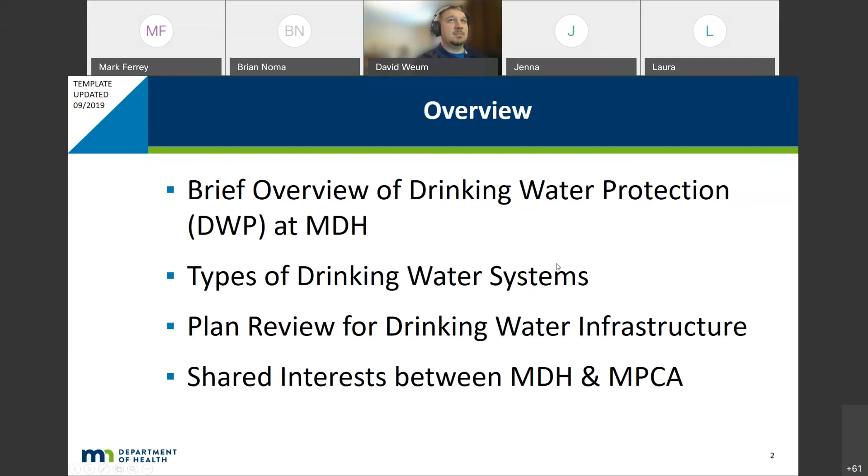So, Department of Health. Our primary responsibility is the Safe Drinking Water Act. That's a federal law, first enacted in '74, and it's been amended a few times, in '86 and '96. Basically, EPA gives the Department of Health primacy in the state of Minnesota to enforce the Safe Drinking Water Act. It regulates any water source that serves 25 or more people regularly.

The '96 amendments were kind of the big one. They brought a lot of things in, like the revolving fund, operator certification, the consumer confidence report, which is that yearly letter notification of here's what's in your drinking water, source water protection and the surface water rule, as well as cost benefit analysis for MCLs, which I thought was interesting.

I didn't know that was actually when that came into effect, but that's the big difference between the health risk limits that a different part of the Department of Health works on putting together and the maximum contaminant levels, which are the federally enforceable standards. The MCLs have a cost benefit analysis of how much more money it's going to take to treat that contaminant down to another level, and how prevalent it is, things like that.

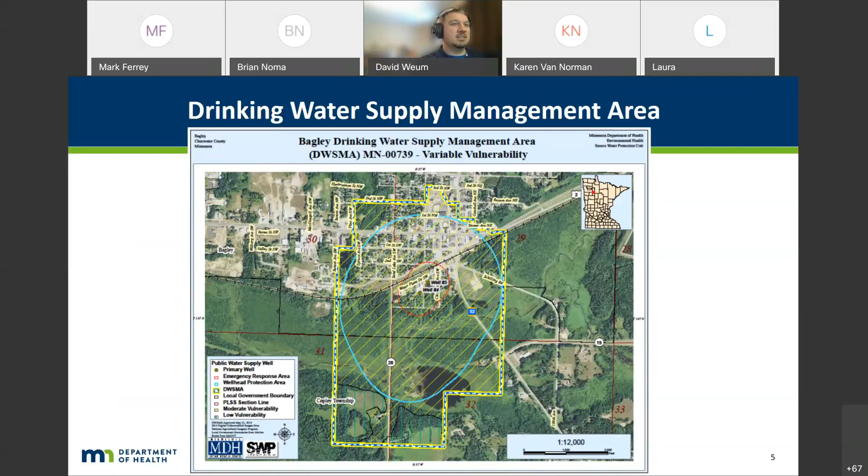And from there, I'm going to stop sharing and give it over to Brian to talk with you a little bit about drinking water systems. Oh, I'm going too far ahead.

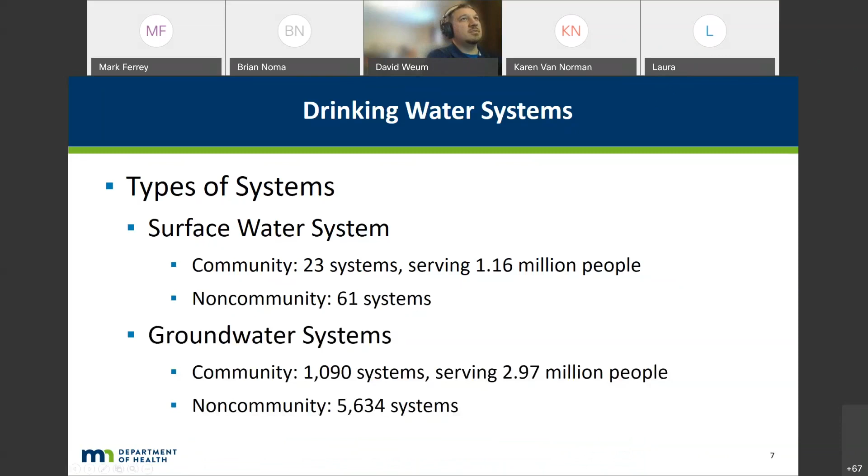All right, okay, thanks David. So I'm going to talk about drinking water systems. I'll probably be a little heavy on the community side, because that's where I reside. In this slide you can see we have two types of systems: surface water systems and groundwater systems. You're not sharing it—oh, hang on.

No. There we go. Is it up now? Yep, yes, looks good. Okay.

So two types of drinking water systems. We have surface water systems, so systems that get their source water from surface water, and then groundwater systems. So if you look at the numbers, community systems, there's 23 community systems in the state of Minnesota, but they serve 1.16 million people. So not very many systems, but lots of people.

So what I usually tell people is the typical setup is going to be very large communities, and we'll kind of show that a little bit later. We also have 61 non-community systems, and so in the non-community realm, these systems typically are going to be up in the northeast portion of the state for resorts and businesses and churches and things up in that neck of the woods.

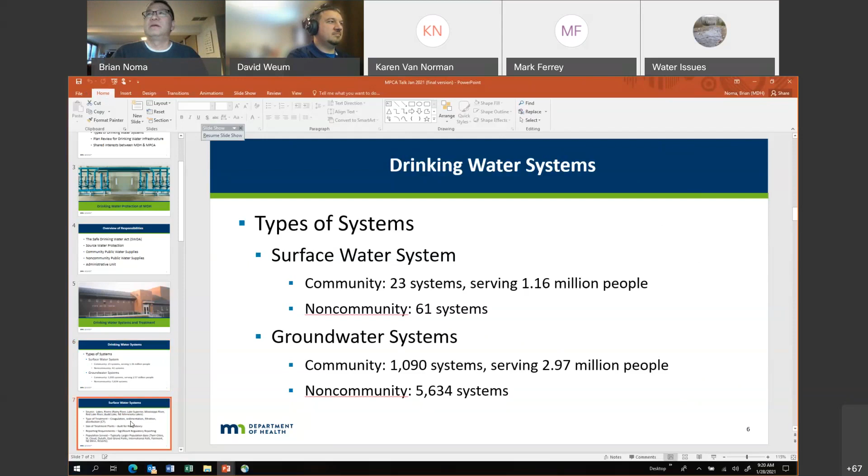Brian, the slides you're sharing, it's not showing the slide you're talking about. Oh, gosh. Do you have two monitors, Brian? Yes. Okay, that's probably what the challenge here is. So, all kinds of issues today. All right, there's my surface water slide. Can you see that now? There we go. Yep. Yes. Sorry about that.

Okay, so the sources, again, lakes and rivers. So I have a few of them named there. Budd Lake being kind of the outlier down there in southwest Minnesota. And again, northeast Minnesota lakes, areas geologically not rich in groundwater.

So the typical type of treatment is called conventional filtration, where you have coagulation. You make the particles in the water bigger. Sedimentation, you let them settle out. The ones that don't settle out, you'll filter them. And then you have to disinfect the water with chlorine or some disinfectant which does carry a residual.

And then the important part there is the CT or disinfection time. So it's depending on the water temperature and a couple other factors. We look at making sure that it's disinfected properly before it's sent out into the distribution system.

One of the kind of key things for surface water systems is they typically have to be built for redundancy, and that's so that the city or the place that it serves doesn't ever run out of water. So in this case, for a city like Minneapolis, St. Paul, or St. Cloud, you're building the plant twice as big as it needs to be for its highest demand day.

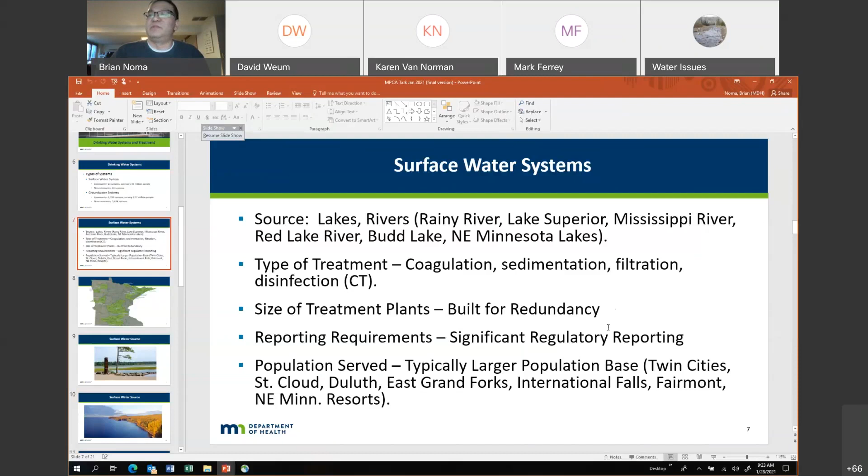And so again, we look at population served. So we got the Twin Cities, St. Cloud, Duluth, East Grand Forks, International Falls, Fairmont, and then the resorts up in northeast Minnesota. So here's a map showing the overall distribution around the state of the different surface water systems. I think the Fairmont one is kind of the outlier again, but it's in an area that maybe groundwater is not as readily available, or if it is available, it might not be of enough quality to use as a source. But you see there's quite a few of them up in the Northeast, some in the Northwest, and then along the Mississippi River.

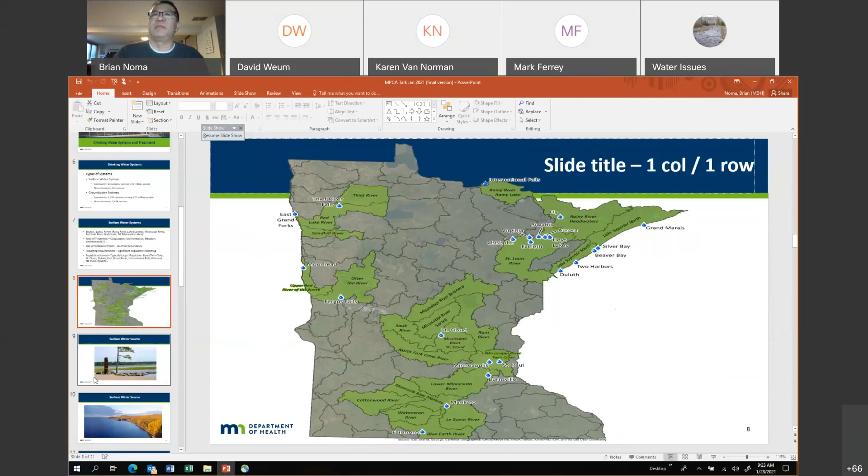So I've got a picture here. This is the headwaters of the Mississippi River. This is where it's probably at its cleanest. If you looked at the other end of the Mississippi River down in the New Orleans area, we always like to joke that it's probably been in and out of at least 15 people by the time it gets to New Orleans.

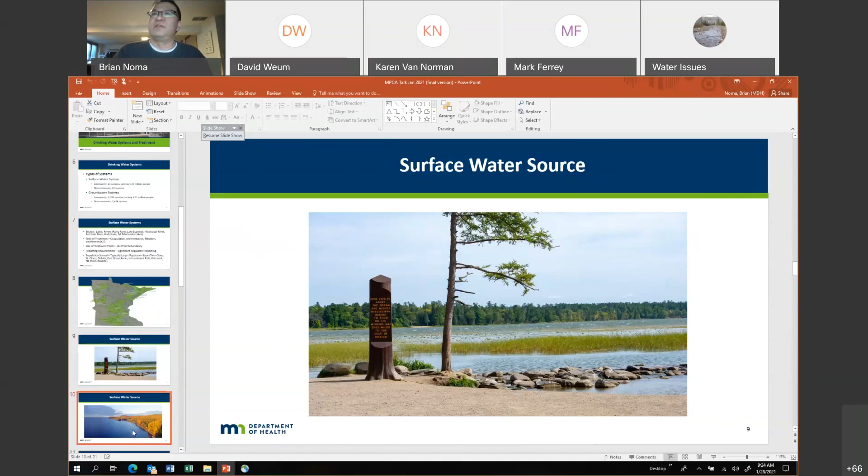And then the other surface water picture that I have is Lake Superior, and so Duluth, and I think Beaver Bay is on this, a couple other systems up the shore, but a pretty pristine and pretty clean source to start out with.

So groundwater systems, that's where most of the systems are going to draw their source water from. It's going to be either glacial drift or bedrock aquifers. For groundwater systems, some have no treatment at all, and by that I mean there's no filtration or anything else. Municipalities are required to feed fluoride, but other than that, they're not even required to feed chlorine unless they have ongoing bacteriological issues. So you could have some with no treatment at all other than fluoride. You could have chemical additions.

So what a lot of systems do is they might feed polyphosphate to keep the dissolved iron and manganese in sequestration. And then by feeding that, you are also required to feed chlorine, because phosphates are considered a food for bacteria. So you might have systems as simple as a couple chemicals. The typical treatment, though, is going to be iron and manganese filtration, but you also will have advanced treatment.

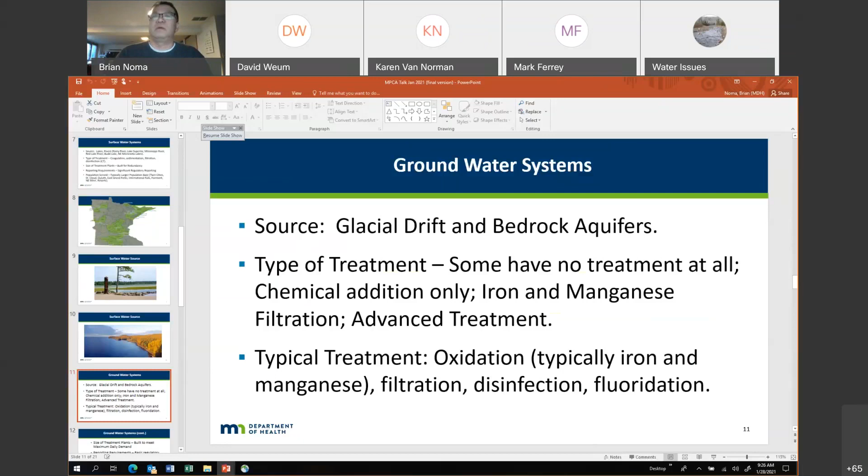So again, the treatment plants are typically built to meet the maximum daily demand. You're going to meet whatever the highest day you estimate for your system. So groundwater plants can be built quite large too, in the fact that they're probably not going to meet their maximum daily demand more than maybe a week during the year, but they do want to be able to provide water at all times of the year.

The beauty of their system is they're not going to build it double the size, and the reason is typically if the treatment plant was to go down or need to be taken down for a reason, a lot of systems have interconnects with other cities so they can get supplies of water from other cities. And then also if their ground source water is good quality, they can just pump their groundwater straight into the system untreated as long as it meets the regulatory requirements.

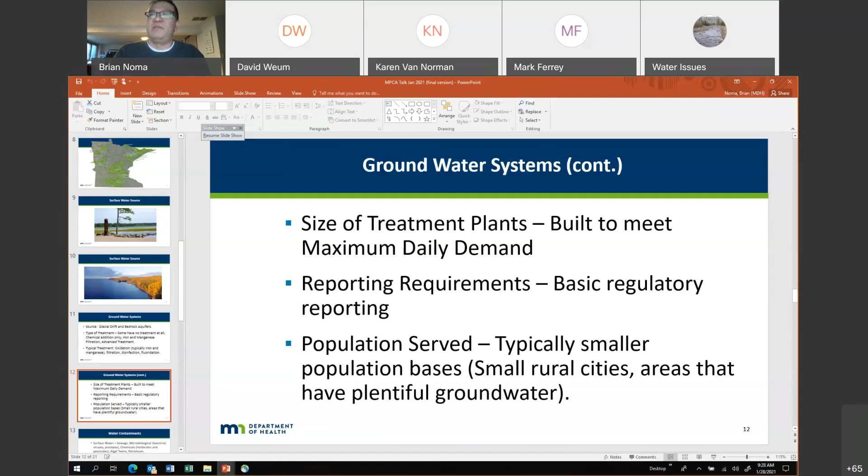And so the reporting requirements for these are pretty basic compared to surface water. There's not nearly the amount of data collection or monitoring. So there are some reporting requirements, but not a lot. And again, the population base served here is typically going to be the smaller population base, rural cities, areas that have plentiful groundwater, which is most of the state.

And then, talking about water contaminants, in the surface water realm we're looking at possible sewage contamination from discharge from sewage plants that might be upstream if they're on a river, and microbiological, so bacteria, viruses, and protozoa. We're always constantly monitoring for that.

Chemicals, herbicides, pesticides, chemical spills, chemicals being used upstream in industrial uses, and then algal toxins, which has been a more recent issue with the weather patterns that we've been seeing, and then some petroleum.

But the petroleum is more probably seen in the groundwater contaminants, where we have naturally occurring contaminants such as radium and arsenic, but we also have some man-made contaminants: volatile organics from spill sites or Superfund sites, PFAS compounds, and then petroleum spill sites, so old gas stations, buried petroleum tanks, etc.

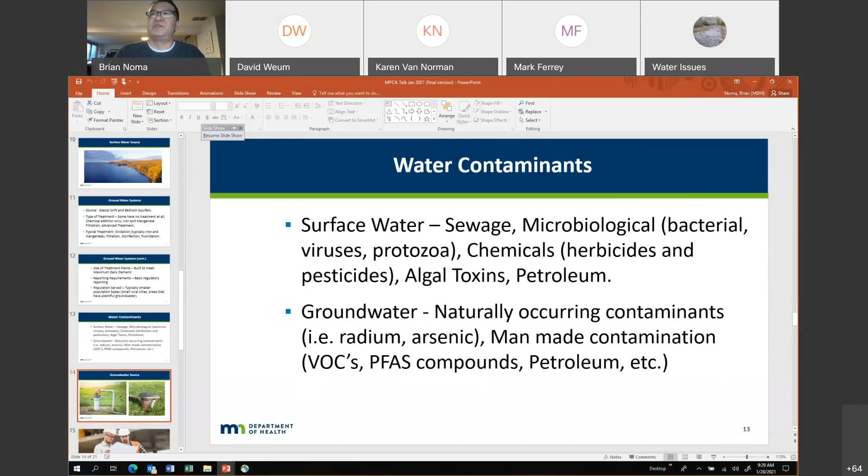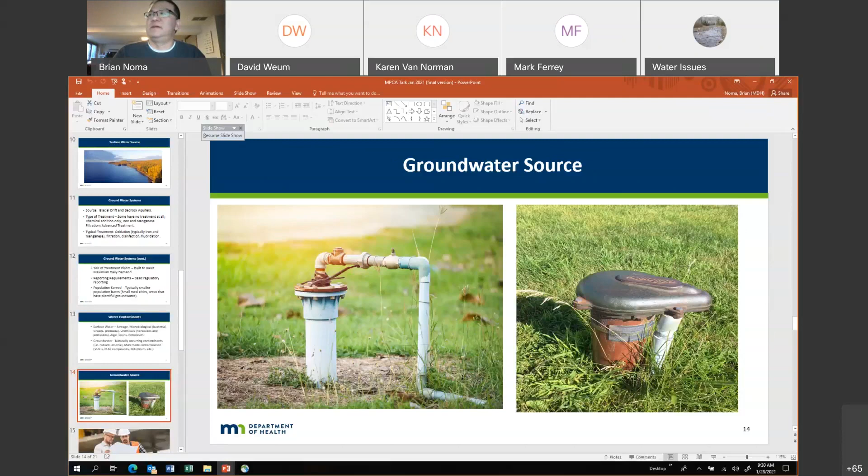Got a couple pictures here of wells as we typically see them. When we're out looking at these, we're making sure that the well is constructed properly, setbacks to sources of contamination are met, and that the well is constructed in a manner such that contamination cannot enter the well itself. So that's what I have there, and I think we're back to David.

All right, I'll start sharing again, hopefully. There we go.

The one exemption specifically listed is for non-community wells. I don't know exactly when that lobbying effort happened, but at some point the well drillers got very tired of having holdups on their well drilling projects, so that came into the rule at that point.

We get maybe 3-4 new treatment plants and maybe half a dozen to a dozen renovations of treatment plants, and probably similar for storage. For whatever reason, this last year was kind of a well construction boom, which caught me off guard. Usually it's maybe 4 or 5 a year, but we got quite a few this last year. And then some chemical feed and well house plans come in from time to time.

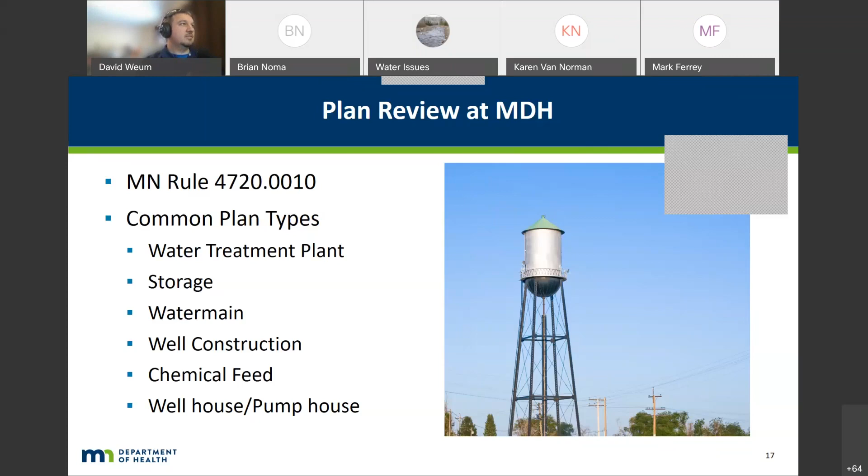When we review plans, we typically review them to the 10 State Standards. Recommended Standards for Water Works is what they're actually called, but almost everybody refers to them as 10 State Standards, because it's a group of 10 states and a Canadian province that get together and write these, and Minnesota is one of those states.

Brian spent a number of years on that committee, as well as being the president of that committee for a while, I think maybe for this most recent edition, and I have stepped into that role just this last year.

CEAM is City Engineers Association of Minnesota. We use them as a reference for a lot of our water main work, and then the plumbing code and the well code are also used where it's applicable.

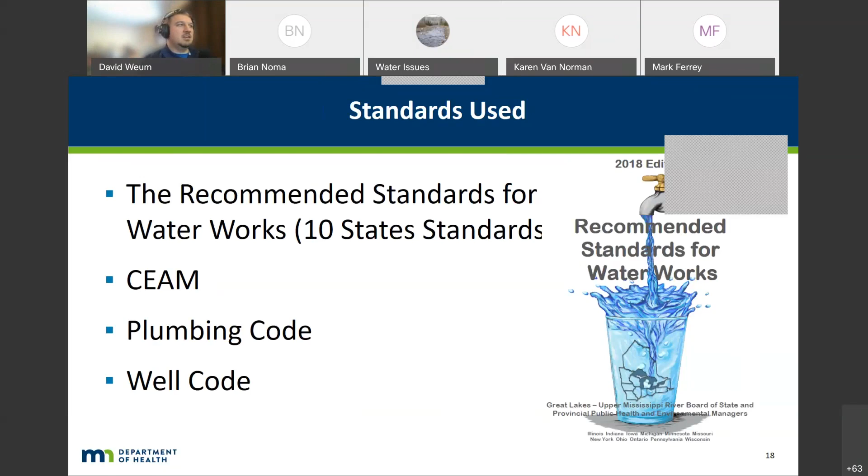We have some agreements with DLI to do a little bit of plumbing review when it comes to treatment plants and well houses and things like that, because we're seeing the plans already and it's something we're pretty familiar with. And Brian spent a number of years reviewing plumbing anyways, so it kind of seemed like a natural fit.

So I wanted to talk a little bit as well about pilot studies. We'd require a pilot study, that's a small scale version of a treatment train or treatment system that they run and do tests on to verify that it works. We require them for newer technologies or newer applications of technologies. And our biggest rule is that the full scale design must mimic the pilot.

We've had situations where the pilot doesn't work that well, but they still want to go forward with something full scale. They don't want to quote unquote waste the money, but it's still useful information. So they didn't waste money on a full scale design that won't work.

And probably the biggest thing we've seen needing pilots lately is biological treatment. It's kind of a wastewater technology that's being managed and used for drinking water purposes. It's essentially letting the natural biology in the groundwater source develop, and it's typically used to break down ammonia.